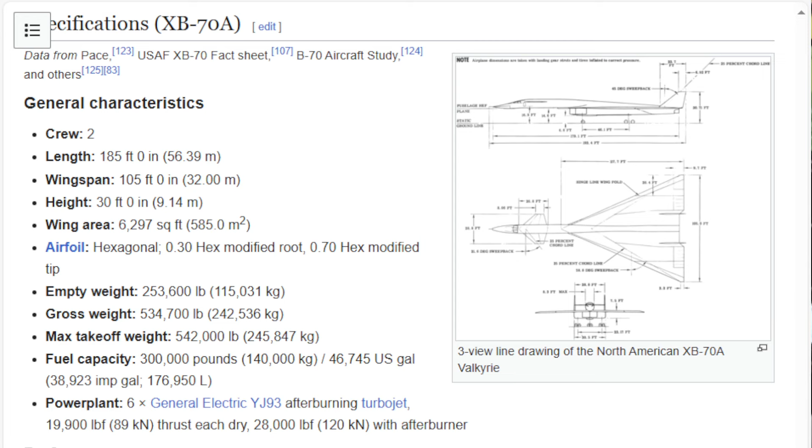Check out these stats: length of 185 feet, wingspan of 105 feet. Wing area, huge. Max takeoff weight, power plant. Here's the stuff we're interested in right here.

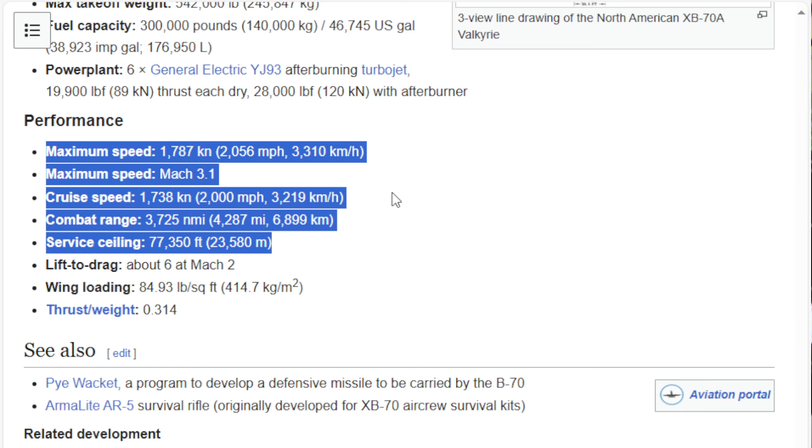We have a maximum speed of Mach 3.1, a cruising speed of 2,000 miles an hour, with a combat range of 4,287 miles at 77,000 feet. Now, it cruised a little lower than 77,000 feet, but it was up there in the stratosphere at Mach 3.

In the 1960s, its test flights took place in the early 1960s. This is a very famous aircraft, and there's a wonderful program, if you're not familiar with it, it's called Wings. It was on the Discovery Channel back in the day. And this is part of why it was able to reach such speeds and height. Now, I can't play it with sound for copyright reasons, but...

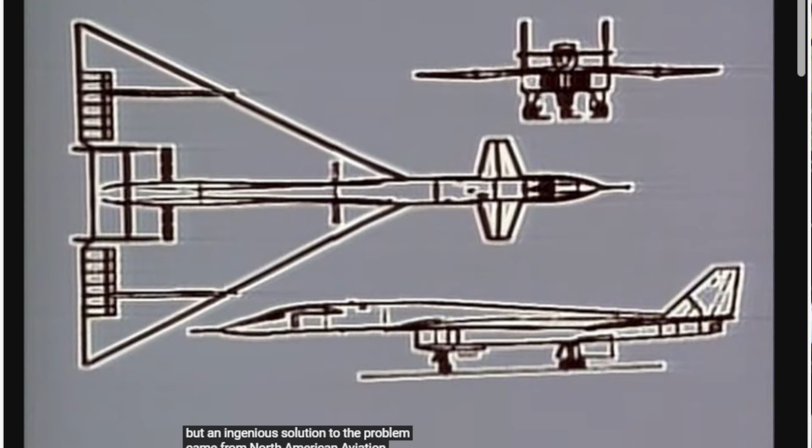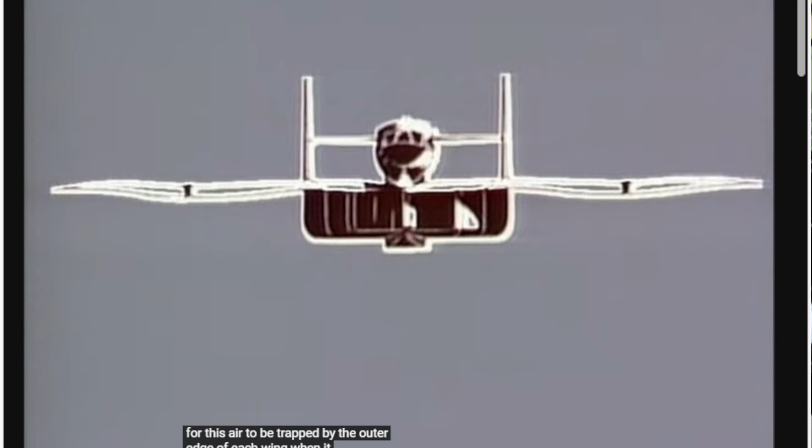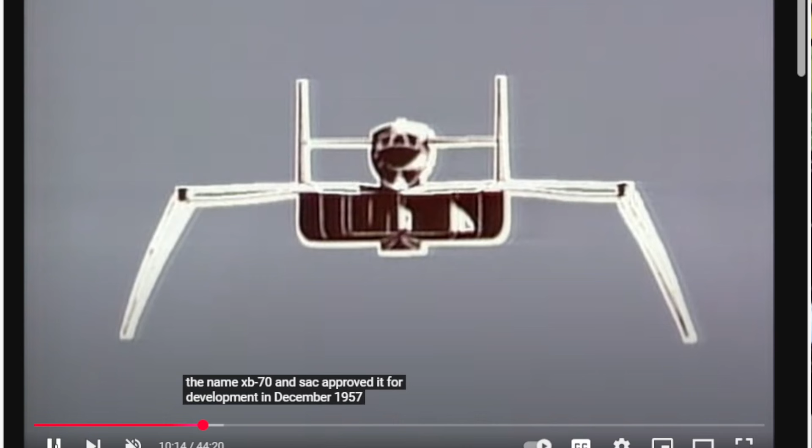An ingenious solution to a problem came from North American Aviation. The company had refined the concept of compression lifts. Their plan called for mounting 6 enormous jet engines in a tapered shape under the aircraft, thus forcing air away from the center section at high speed. The design also allowed for the air to be trapped by the outer edge of each wing. When it was lowered, the compressed air would act to lift the aircraft and help propel it to 3 times the speed of sound. The design was given the name XB-70, and SAC approved it for development in December of 1957.

Almost 70 years ago, we're at 67 years ago, we had already approved a giant aircraft, and this is a giant aircraft. 185 feet long, wingspan of 105 feet, height off the ground 30 feet. This was an enormous aircraft, capable of incredible speeds.

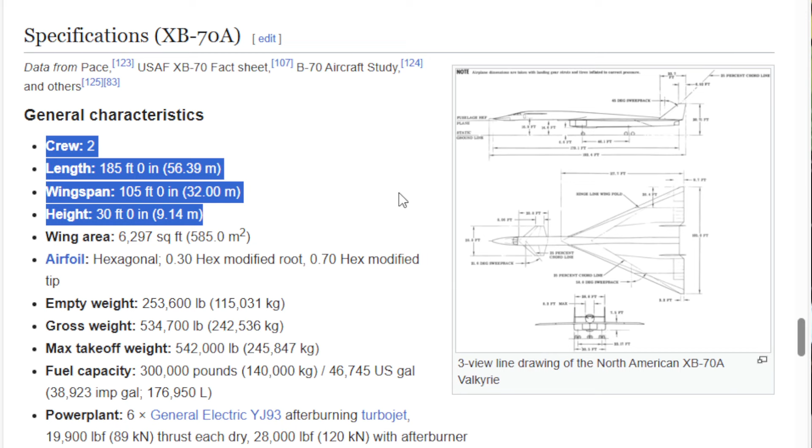I once again cite all the statistics here, and these are all on Wikipedia, which I will, of course, link in here so everyone can take a look at it. But these are some serious numbers. And these are, again, from the 1950s. So imagine what we could do today.

Which brings me to the 7th generation fighter. Again, from 1945. Hypersonic, shooting lasers in space.

Key points in summary: U.S. Air Force develops its next generation, 6th generation fighter. Speculation is already mounting about what the 7th generation fighter aircraft might look like. Could it feature hypersonic speeds, space flight capabilities, and AI-driven autonomy? Advances in directed energy weapons and missile defense could allow a future stealth jet to track and destroy ICBMs in flight. Space flight, hypersonic, directed energy weapons.

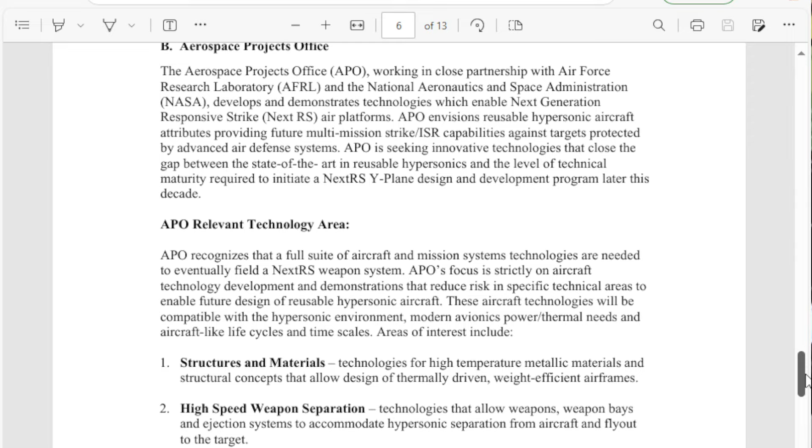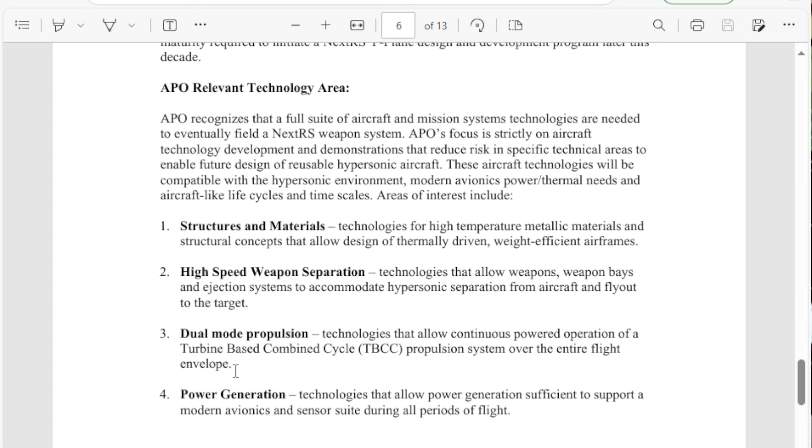You can see the groundwork being laid by the requests here from DARPA. In this request, and this is the actual request, line by line: high-speed weapon separation technologies that allow weapons bays and ejection systems to accommodate hypersonic separation from aircraft and fly out to the target. Dual-mode propulsion, power generation, thermal management system, high-speed turbine engines.

All of this sounds like something that's getting ready to become a spacecraft. A 7th generation spacecraft.

So I guess what I'm wondering, personally, is should the United States just skip the 6th generation aircraft, such as the B-21 and whatever the 6th generation fighter is that they haven't unveiled yet? Use these as technology demonstrators and test platforms, and just move forward into the 7th generation, pinpointing space flight, hypersonic directed energy, and hypersonic weapons as the direction we should go.

This would open up an entire world of technologies, including for the civilian market. Being able to have an aircraft take off, let's just say, from London, using the materials, the engines of something like a 7th generation bomber, hypersonic bomber, like what we're talking about here, the mad scientists at DARPA, who we just love. Could this just be the start of the 7th generation of fighters?